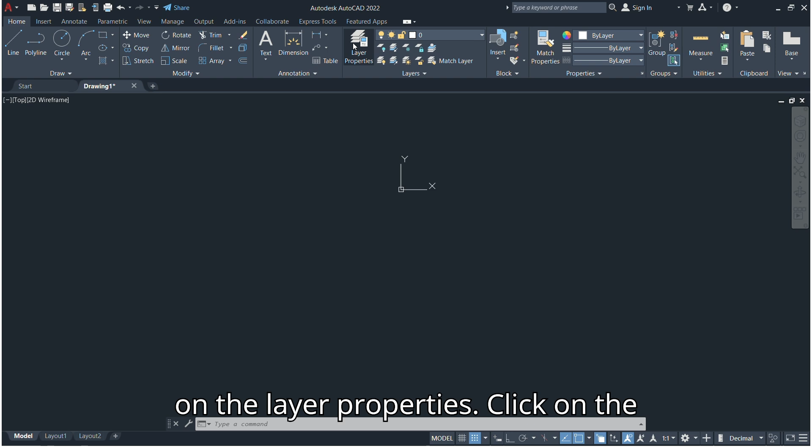After that, you need to do layer properties. To do that, click on layer properties, insert new layers, and then insert the layers.

In this case, I'm just going to show you how to insert layers. I'm going to insert doors, windows, and blocks. As you can see, I'm inserting the layer for doors, then windows, and lastly the blocks.

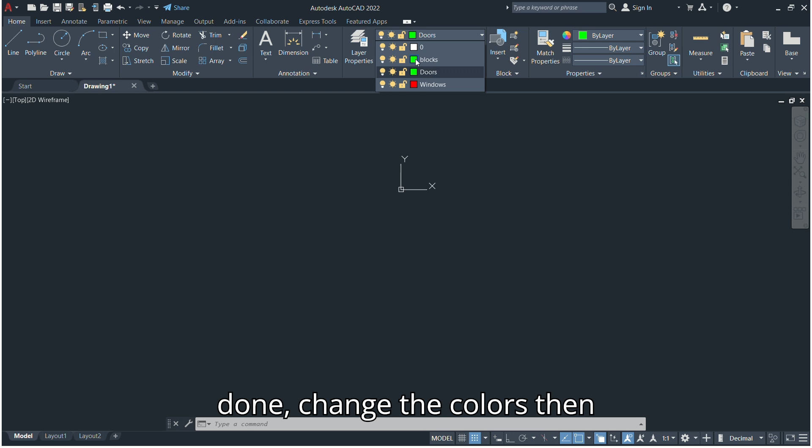After finishing all those layers, you also have to change the color for it to be easier when you're doing the drawing, so that you don't confuse yourself or make mistakes along the way. After you're done changing the colors, remain on the prompt space.

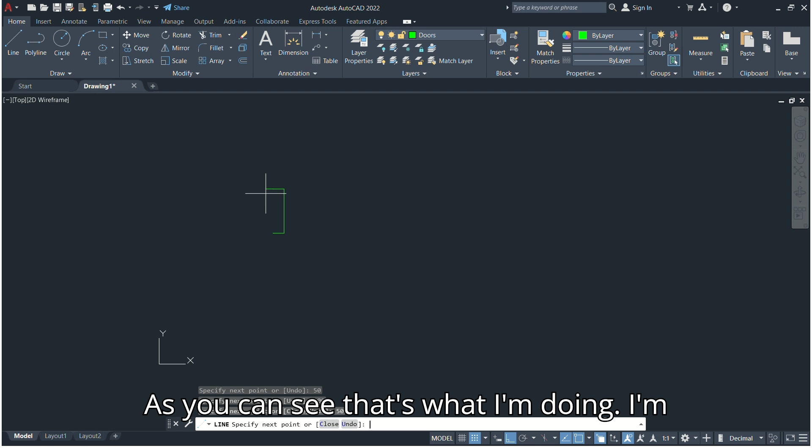So I have to start drawing, choose the line element. First, I have to do a small block that is 50 millimeters by 200 millimeters. As you can see, that's what I'm doing, just the normal drawing. Either way, you can use a polyline to do that.

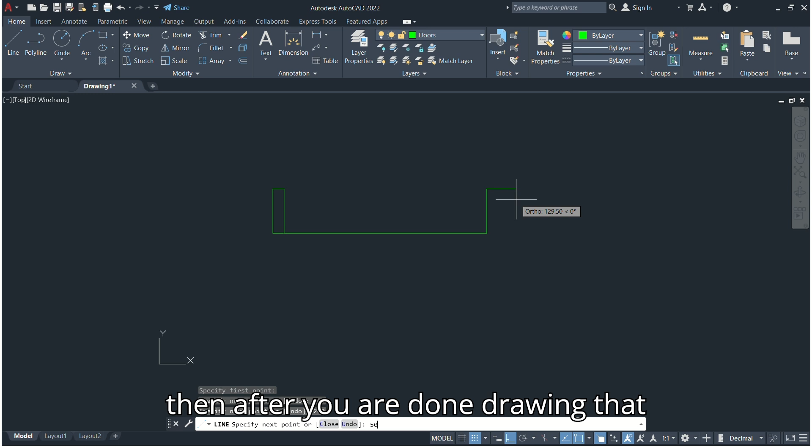Then 900 millimeters, then repeat the same block of 50 millimeters by 200 millimeters the same way. After you are done drawing that, you are supposed to also draw the upper side, or the way the door shall be opening.

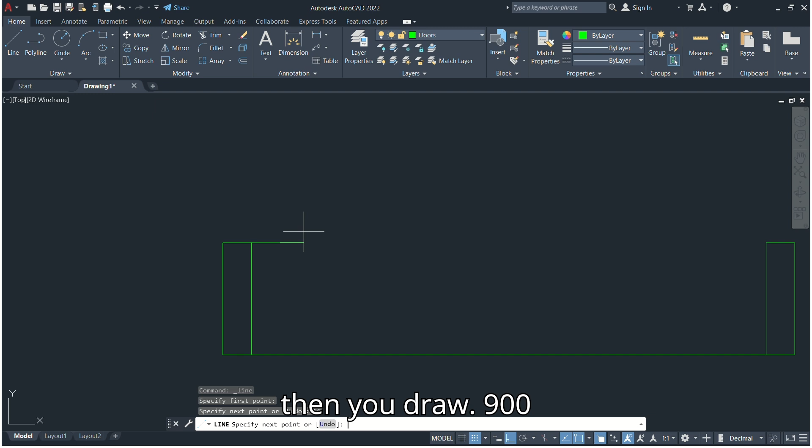So you also have to draw 50 millimeters, and then 900 millimeters upwards, because the width of the door is 900. Then you draw 50 millimeters, and then 900 millimeters, and then you're done.

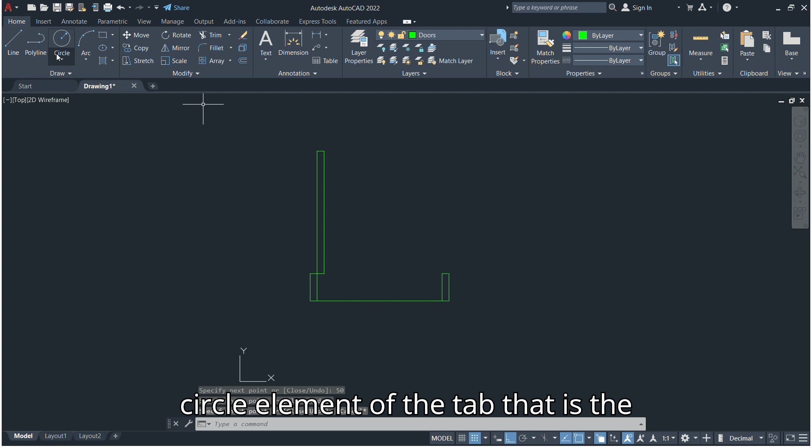Then after that, you need to use the circle element, the circle center to radius tab. In this case, I'm picking my center for the radius since it's 900. Then I have to project it up and ensure that all the sides are well and intact.

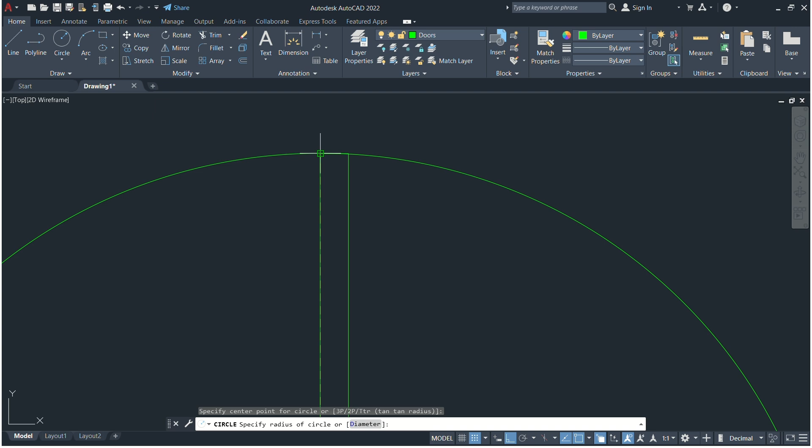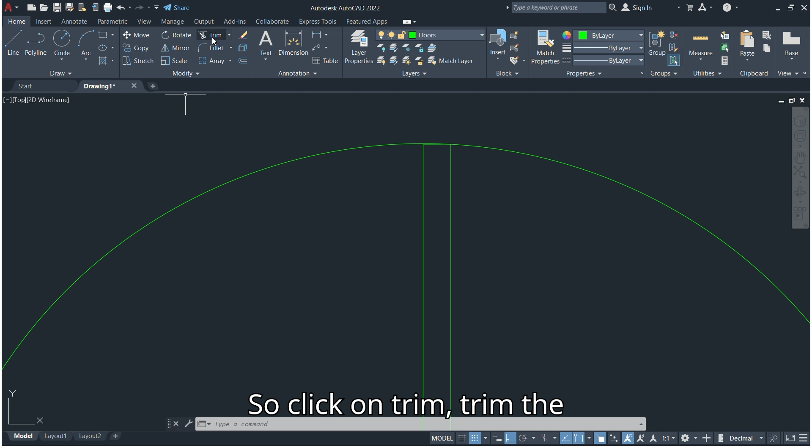Then after I'm done, I have to trim the remaining extra parts. So check through as I am doing that. You have to trim the remaining parts using the trim element under modify. Click on trim to remove the excess or unwanted parts.

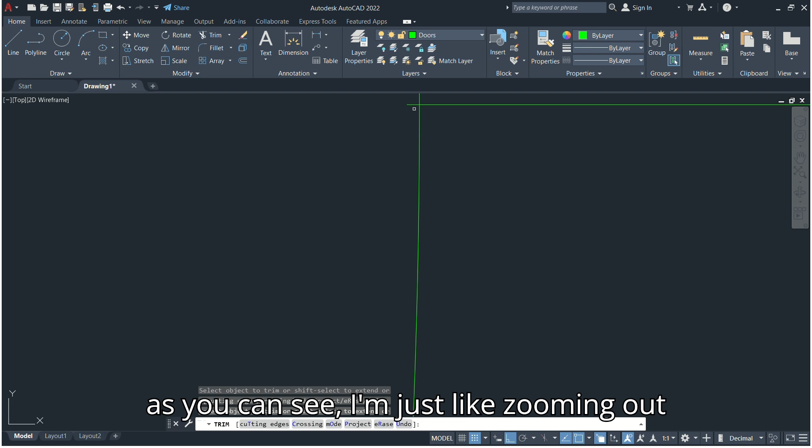And there you are, you're almost having your door. It's actually so simple, you just need to be very cautious when doing it. As you can see, I'm zooming out and zooming in to be sure of which part I'm trimming. And you can see, I have my door.

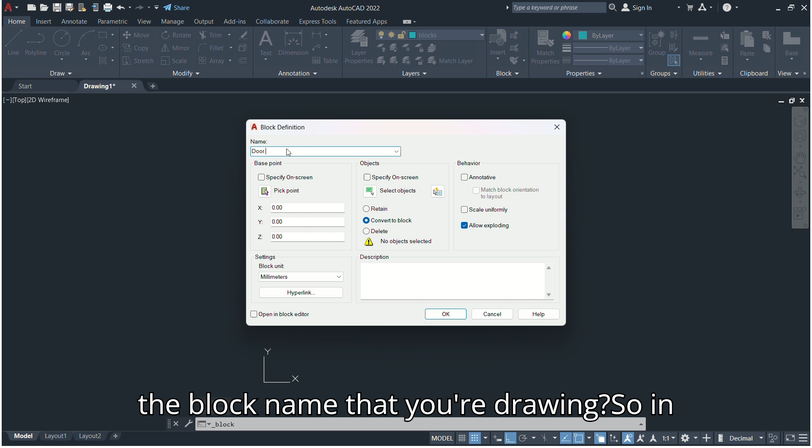Now you go to the blocks, change the color under the layer properties, insert, and then you have to give the name of the block. What is the block name that you are drawing? In this case, it's 900 millimeter width door, that's why I'm giving it that name.

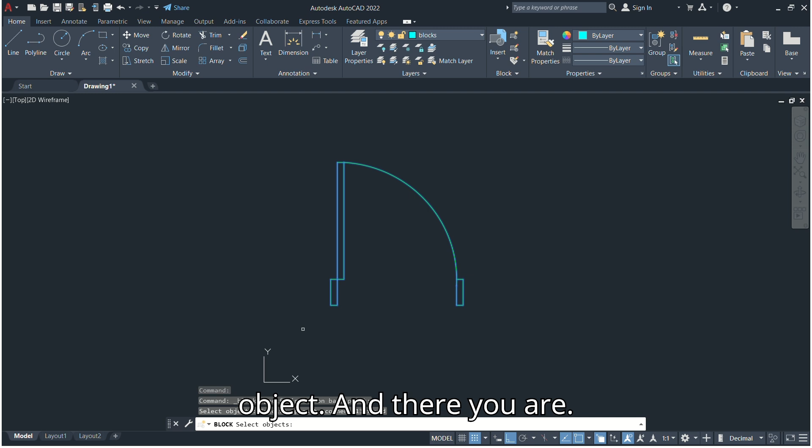Then you have to pick the point. In this case, I'm picking the right part, the lower right part, and then you have to select the whole object. There you are, you have your block. You can move it depending on where you want to place it, and besides that, you can also make copies of the same.

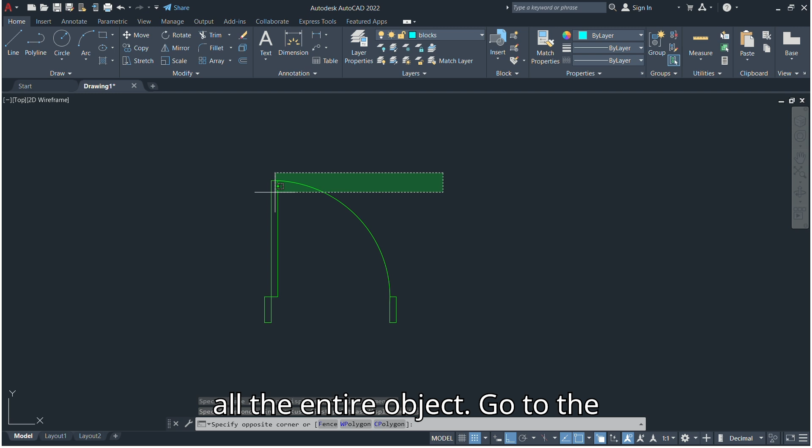Just go to the modify element, or first select the entire object. Go to the modify element under copy, and then you can make copies of the same.

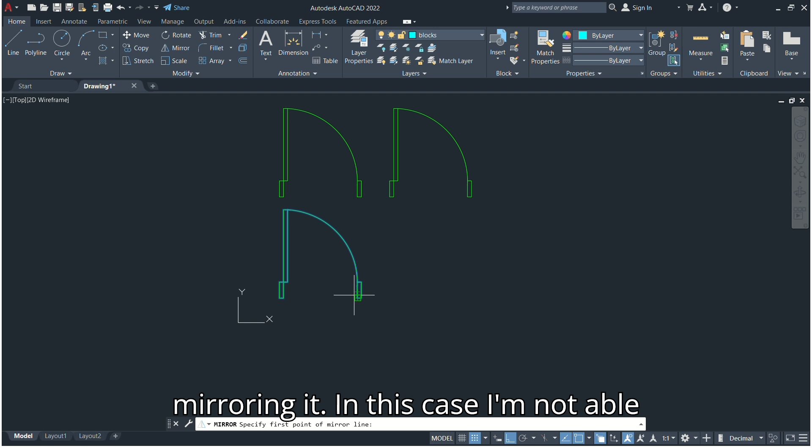After you've done that, you can also mirror it to have the same if you want double doors. As you can see, that's what I'm doing, I'm mirroring it. In this case I'm not able to trim some parts of the blocks because it's already an object, so I'll show you how to do it in the next video.

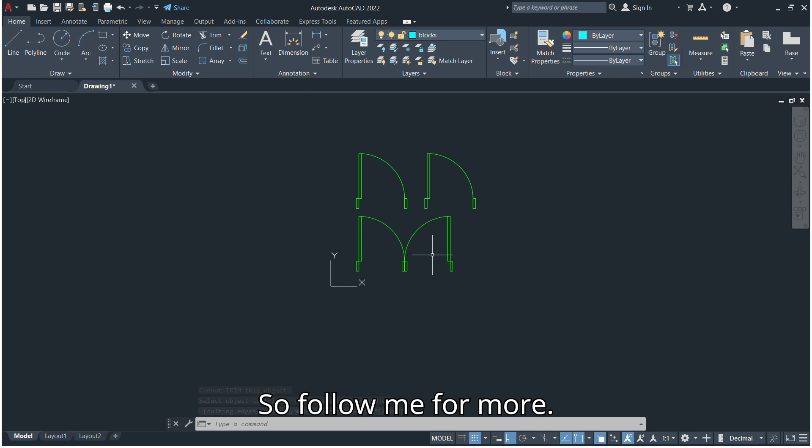Yes, and that is how you have your block. So follow me for more of that. With time, we are going to learn how to do a door, a window, and different shapes of doors, as well as other elements that can be used in AutoCAD.

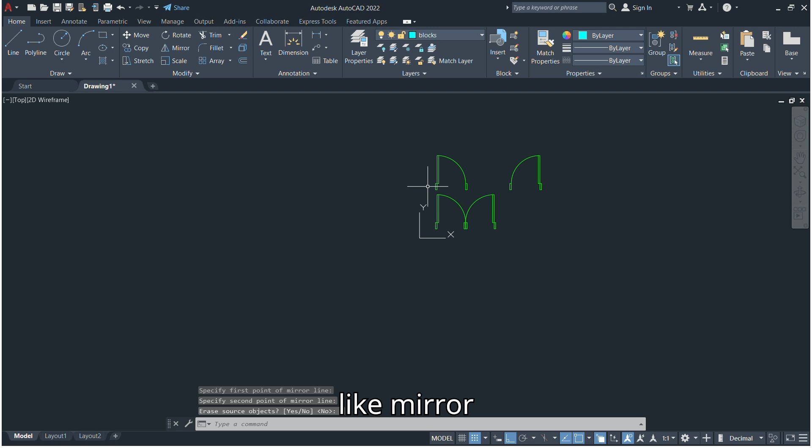Similarly, you can also mirror it and have a different view based on how you want the door to be oriented.